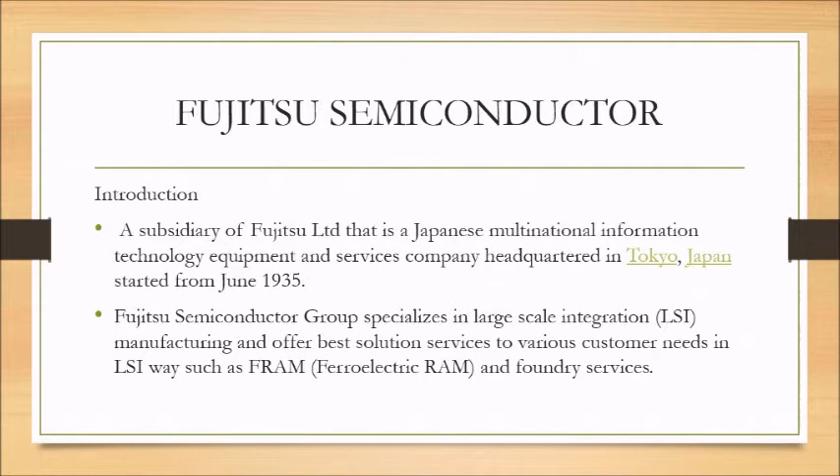According to a market research company, in 2015 Fujitsu Semiconductor climbed to rank 8 in the global semiconductor foundry market, having previously ranked 10th in 2014, with a growth of 29.4% within 1 year. Fujitsu Semiconductor has received numerous awards, including the Microelectronics and Electronic Device Award regarding development of high reliability technologies for ferroelectric random access memory and its mass production in 2014.

It was also awarded the Okochi Memorial Technology Award of Japan in 2011, the Innovation Award by Wall Street Journal Technology in 2006, and, with the invention of chemically amplified photoresist, an award from the Japan Institute of Invention and Innovation in 2010.

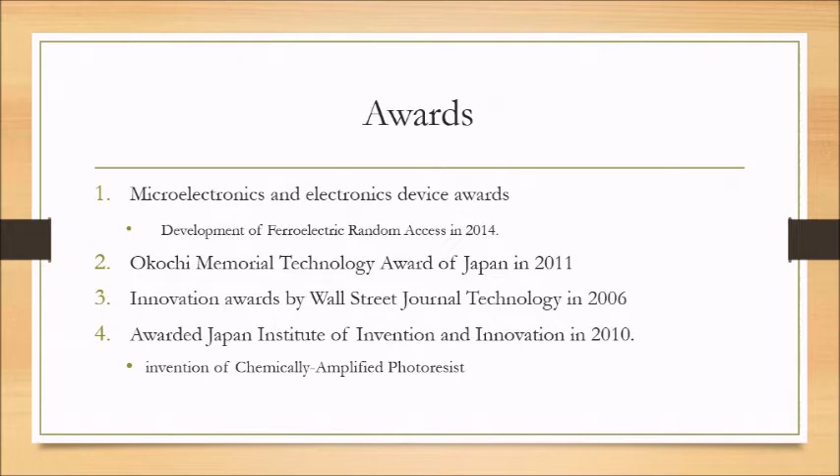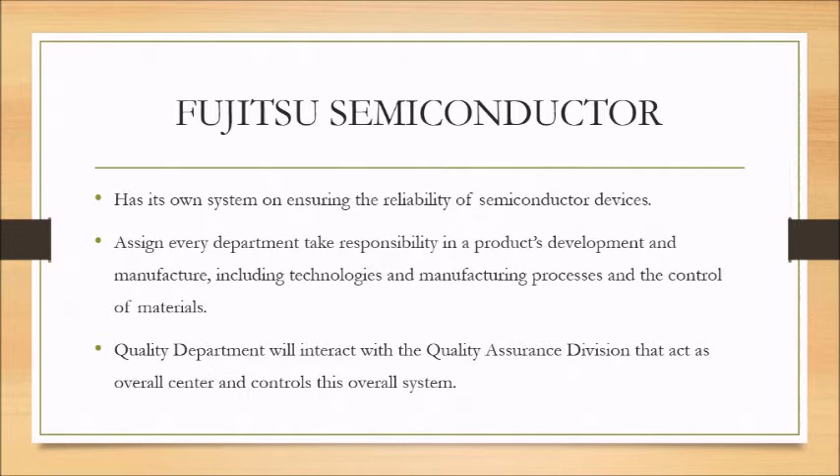Fujitsu Semiconductor has its own system for ensuring the reliability of semiconductor devices by assigning every department responsibility in a product's development and manufacture, including technologies, manufacturing process and the control of materials. The quality department in every Fujitsu Semiconductor manufacturing plant interacts with the quality assurance division, which acts as the overall center and controls this overall system.

The thesis statement of this assignment is that the overall contribution of all departments in Fujitsu Semiconductor is required in order to achieve total quality management. Next, we'll talk about a couple of factors that Fujitsu Semicon took to ensure that the quality of the product is assured.

To begin with, Fujitsu Semicon deeply believed that human resources are the most basic and fundamental element to ensure quality and reliability. To achieve this goal, the Fujitsu Semiconductor Quality Assurance Division provides extensive and continuous personnel training regarding the job scope at every level and each department of the company. Their goal is to train their employees to think creatively and to turn their ideas into products, benefiting their company.

Apart from that, in Fujitsu Semiconductor, employees also receive quality control education and training in which they learn how to improve product quality by employing consistent quality goals. This training also helps to improve overall employee morale.

In addition to performing regular quality control checks at each production stage, each employee is also given the opportunity to independently apply the training results to perform autonomous self-checks, which aim to ensure quality and reliability and to identify non-conforming products as rejects early on. The Fujitsu Semiconductor Quality Assurance Department also implements multiple trainings for new recruits, assuring that they are well prepared for the job before starting to operate.

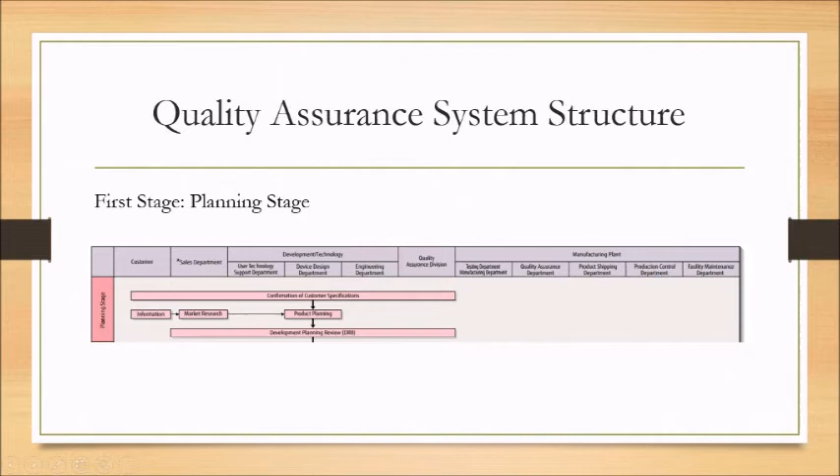In the second stage, which is design and experimental development, the design of the product planning will be reviewed by engineering department, and this department will further review the technical side. Pilot production will be undergone after that. New methods of process and system will be tested based on the product's characteristics and reliability evaluation. Engineering standards will be established for quality purposes.

The product will be reviewed again by Quality Assurance Division. After that, manufacturing plant will do pilot mass production to test the system under mass production. Then Quality Assurance Department will test the product for characteristic evaluation and quality test after pilot mass production is complete.

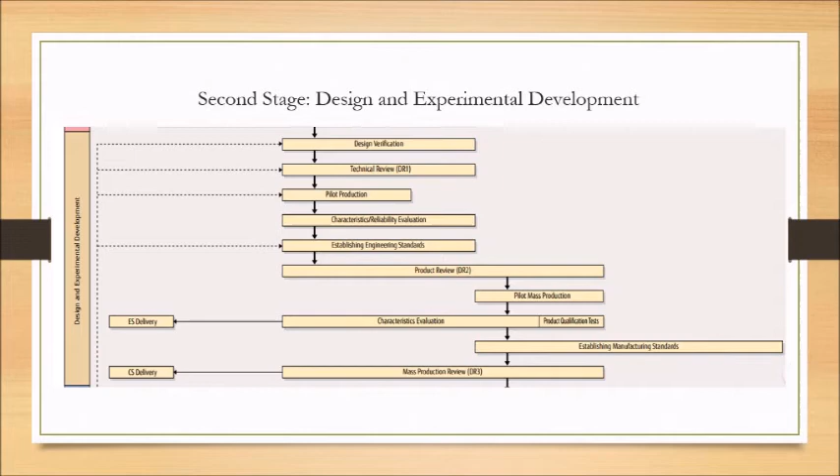Quality Assurance Division will review the mass production again. During the third stage, which is the mass production stage, initial shipping control will be implemented. Mass production stability will be reviewed before the manufacturing process undergoes.

During the manufacturing process, many departments will be involved, such as production control department, which will control the product and material. Facility maintenance department will do maintenance on the process equipment. QA inspection and statistical process control will assist during the process. Final test will be undergone by the testing department after the product is produced.

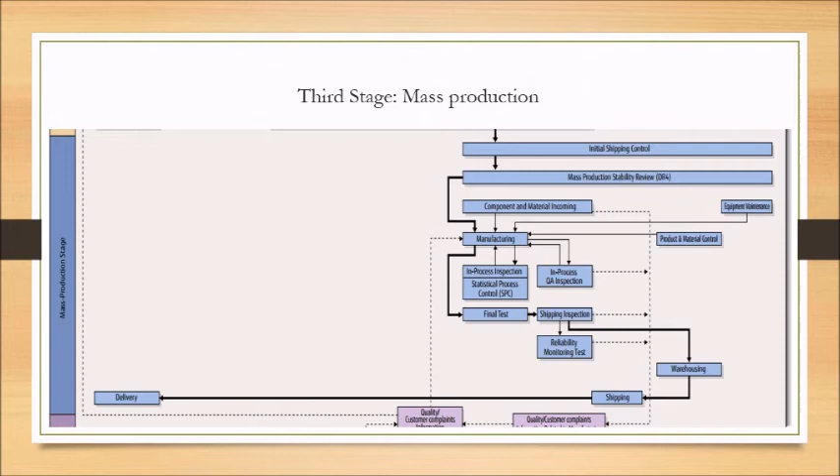Reliability monitoring tests will run in the shipping inspection. The products will be transported to warehouse, ship, and delivered to the demanded place. In the last stage, where the customer is already using the products, customer complaints will be handled. Failure analysis will be implemented to locate the problems.

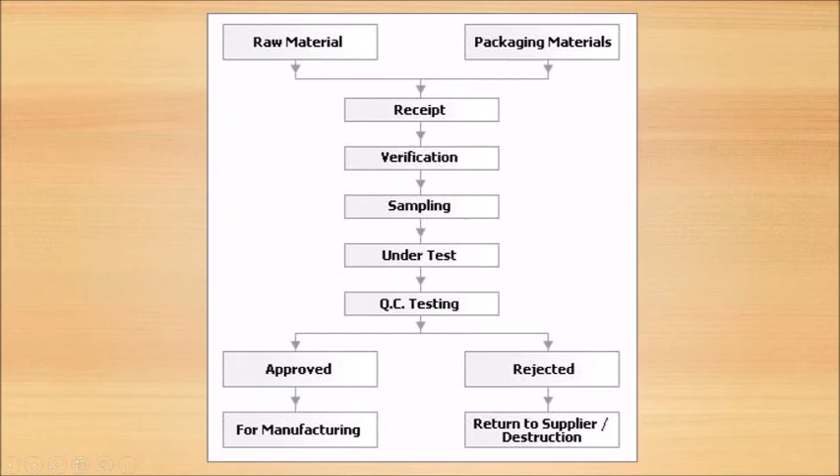When it is a product quality problem, this problem will be submitted back to stage 2 to do certain correction and improvement regarding the quality of the product. This is the QC flow diagram. It shows how QC is going to operate when getting raw material from suppliers or from other plants.

The first approach that Fujitsu Semiconductor applied is failure mode effect analysis, which in short is called FMEA. FMEA is both a corrective and preventative process used to confirm the implementation of measures designed to deal with anticipated faults.

Fujitsu Semiconductor's FMEA refers to the evaluation level described by the AIAG manual, then evaluates severity, occurrence, and detection by 10 levels. By implementing FMEA in product design and processes, the generation, detection, and effects of all possible failures and their causes are evaluated. A risk priority number is formed by combining the values recorded for each item.

If the risk priority number is 100 points or more, Fujitsu Semiconductor will analyze the cause and mechanism of the fault occurrence, then improve it and confirm the improvement effect by recalculating the risk priority number. Moreover, regardless of risk priority number points, the process where severity is high, which is 7 points or more, is given priority and improved.

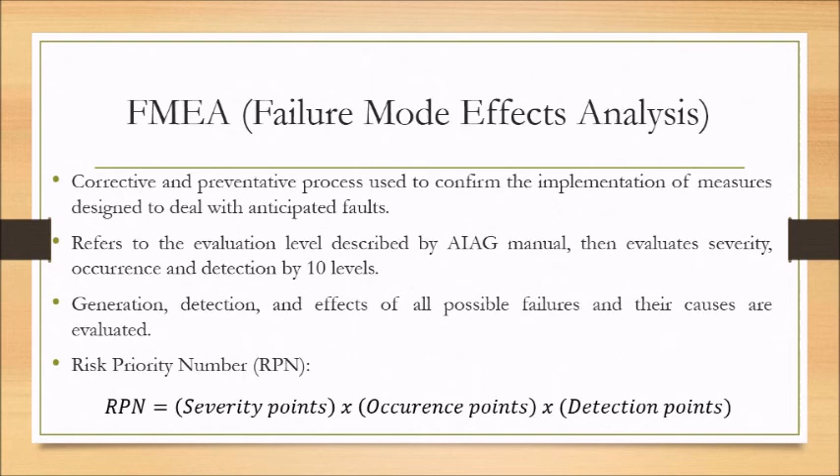Failure analysis and identification of root causes is also one of the approaches used by the company. The company will monitor for faults during the production and analyze the causes of defective products. These results are then used as feedback to the production process.

Furthermore, all returned products that the company receives from customers will also be carefully examined and suitable measures will be taken to prevent recurrence. Analytical feedback which can directly improve reliability will then be provided to the concerned groups.

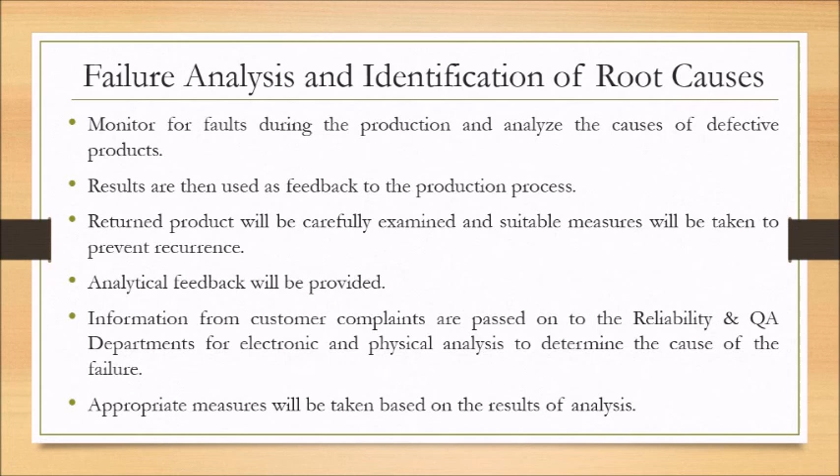Customer complaints are first directed to the sales or customer support departments. Information is then passed on to the reliability and QA departments for electronic and physical analysis to determine the cause of the failure. Related divisions will then take appropriate measures based on the results of this analysis. In addition, in order to fully correct the problem, similar measures will be taken at all of the manufacturing facilities.

In customer claim and complaint handling, whenever a customer complaint arises, the Reliability and Quality Assurance Department responds with an interim report within 2 days of receipt of the customer complaint. The department then produces a final report within 2 weeks of receipt of the customer complaint.

For customer claims informed from customer to QA department, the department will then take initiative, and the investigation or improvement action is executed using the 8D methodology, namely team formation, problem description, interim containment actions, root cause analysis, corrective actions, verification of corrective actions, preventive actions, and team and individual recognition.

The investigation result is then reviewed by the related section of the company, and necessary corrective action will be executed. Then the result will be reported to the customer.

In conclusion, quality assurance plays a very essential role in a company for long-term purpose. Fujitsu Semicon's Quality Assurance Division has implemented multiple levels of programs and tools to assure the quality of their product fulfills the expectation of their customer.

The thesis statement of this assignment is found to be valid. Thank you.